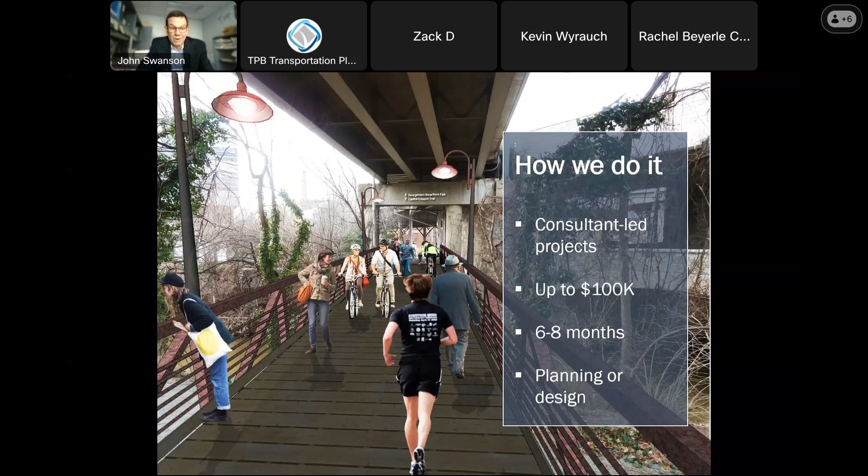We do it with a very simple model. It's a consultant-led program - the projects are consultant-led. We fund them up to $100,000. The projects typically last 6 to 8 months, and we fund planning or design. This is really a very small scale, quick turnaround program.

We've also created a sister program called the Regional Roadway Safety Program. This is really designed to address some of the really alarming trends that we've seen nationwide and in the region regarding safety and increased accidents and incidents on our roadways.

A few years ago, a regional study identified factors that contribute to our safety problem and recommended what could be done to reduce fatalities and injuries. Based on strategies in that study, we established the Regional Roadway Safety Program to fund short-term projects to make our roads safer, particularly for folks who are walking and biking.

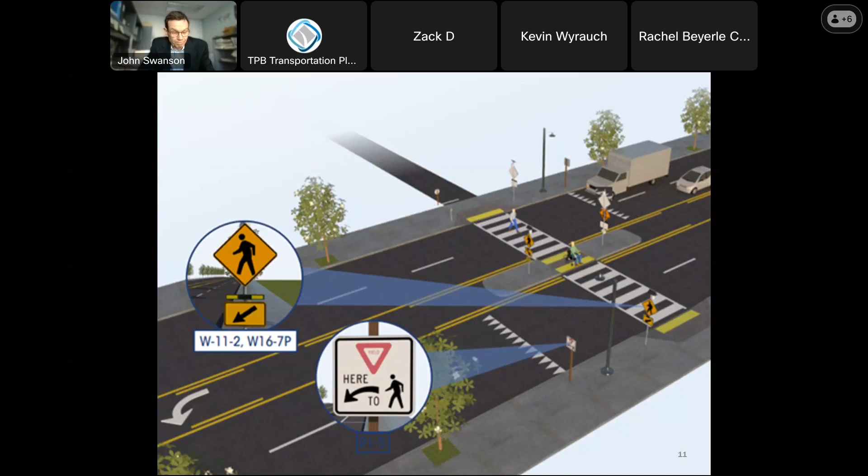In the past 2 years, we've funded 28 projects that take very practical steps, things like planning for infrastructure improvements at intersections and sidewalks, improvements in lighting and signage, designing new guidelines and standards, and conducting safety audits and analyzing crash data.

And finally, I want to tell you about a new program, relatively new, that's going to make it easier for folks to get to and from train stations and bus stations in our region. This is the Transit Within Reach program. We're going to be featuring one project from this program later on from Fairfax County.

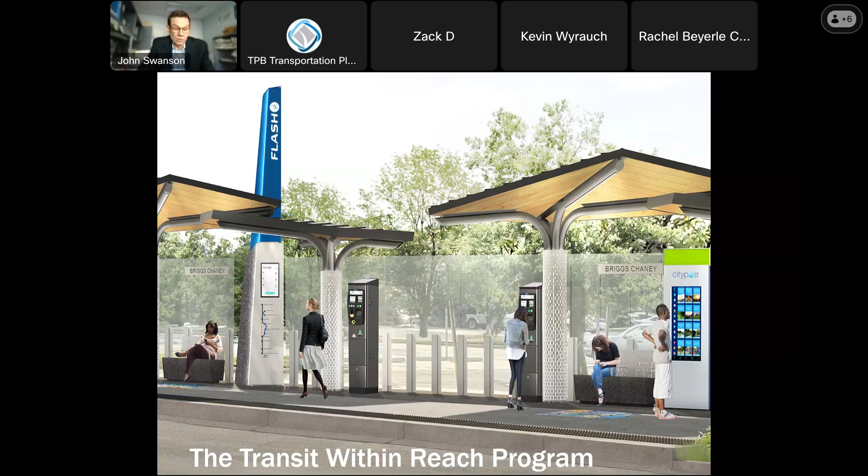But the idea here is simple. In principle, trains and buses should be within reach for a lot of people in this region because more than half of the region's job growth over the next decade is expected to be within a quarter mile of high capacity transit. But even where transit is physically close, it is often not within reach if you walk or bike. Sidewalks are missing, crosswalks are unsafe, trails and paths are yet to be built.

So the Transit Within Reach program was set up to fund preliminary engineering and design for pedestrian and bike improvements. And again, we're using the same model that we use for the other two programs I described. We have a few of these projects currently underway, and we're going to be funding a few more next year. The application period for that will be next fall.

So as you can see, these programs fund local projects, but we really do want to emphasize that this is a regional program. And that's one of the reasons we do regional webinars like this, so you can all learn from each other. And that's one of the reasons also why we have this database where you can download reports and learn about all the different projects and sort by project type.

Finally, I'm going to close with an important announcement. In January, we're going to be opening the application period for the next round of funding for both TLC and the Roadway Safety Program. The application period is going to open on January 6th. You can submit an abstract to get some quick feedback, and the deadline is going to be on March 7th.

So with that, we're going to get started on the program. The first person up is Alex Carroll from Alexandria. Alex has been making really good use of these programs in recent years. She's a real strategic thinker, and I'm excited to see what she has to share about this, the Pickett Street project.

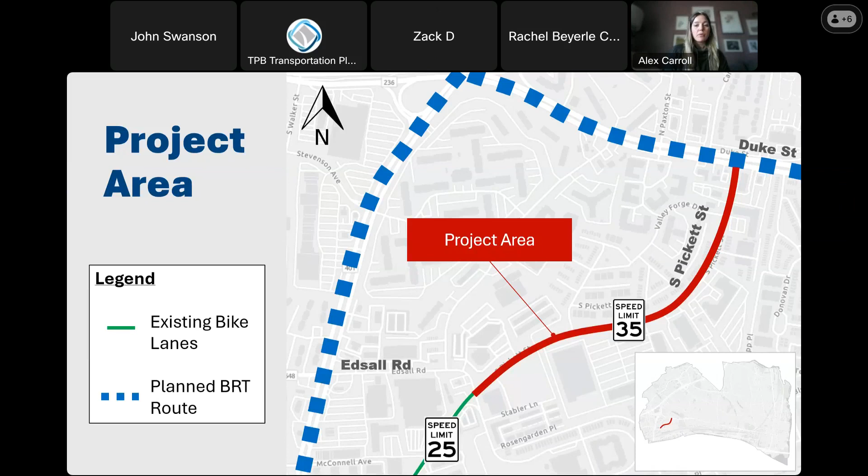The project area is South Pickett Street between Duke Street and Edsall Road. On the west end of the corridor, it connects to further along South Pickett with bike lanes. And then on the eastern end of the corridor, it connects to the future Duke Street Transitway, which is one of our major BRT corridors. So there's an opportunity to make some significant connections here.

It is not uncommon for people to bike here, but there is no dedicated bicycle infrastructure today. Their choices are to either ride on the narrow sidewalk or to share a lane with fast-moving motor vehicles, which can be a pretty uncomfortable experience.

There's also a lot of commercial activity along this corridor. There is a Home Depot and a few car dealerships, which generates a decent amount of truck activity. That is something we are cognizant of at the beginning of this project, ensuring that through the project design we accommodate trucks throughout that process.

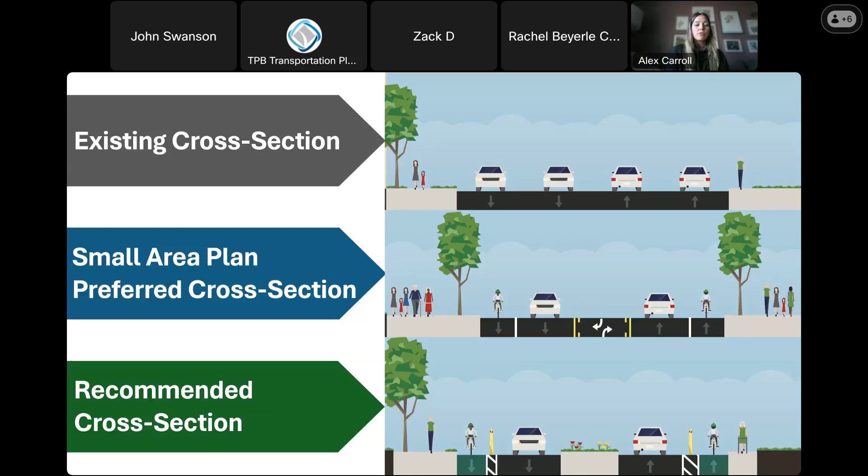We took all of that information and developed a recommended cross-section shown at the bottom here. That's a road diet that consists of one travel lane in each direction, a median that can also function as a turn lane, and protected bike lanes. That pretty much mirrors the preferred cross-section that was in the small area plan for this corridor.

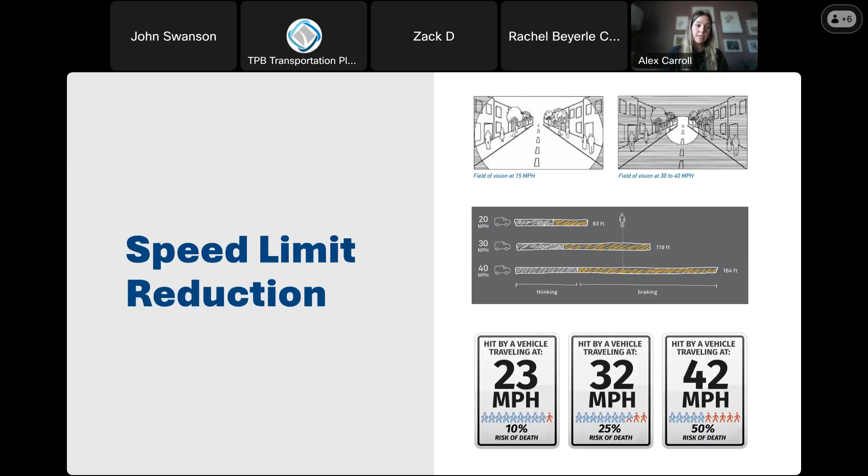In addition to the concept design, we also proposed a speed limit reduction from 35 miles per hour to 25 miles per hour. The idea being that we could reduce the frequency and severity of crashes and provide a consistent speed limit across the entire South Pickett Street corridor, not just in this singular project area.

This project does benefit all users. If you're driving, you can benefit from the safety benefits of a left turn lane. People walking have safer crossing opportunities. People biking will have a dedicated place to bike. It'll be easier to access bus stops along the corridor. And everybody can benefit from a slower speed limit and slower speeds along the corridor.

This project also features a variety of treatments that are classified by the Federal Highway Administration as proven safety countermeasures. Because of those documented safety benefits, we would expect that after implementation, the average annual crashes on the corridor would decline.

South Pickett Street has about 13 to 15,000 vehicles per day, which according to the FHWA makes it a good candidate for a road diet. We did perform a traffic analysis with support from RK&K and found that the corridor would continue to operate acceptably and that delay would remain virtually unchanged.

When we asked people what their priorities were, about half of folks said that minimizing motor vehicle delay was important. But at the same time, about two-thirds of people said that safe pedestrian crossings and safe travel speeds were also very important. So we incorporated all of these things into the project concept design.

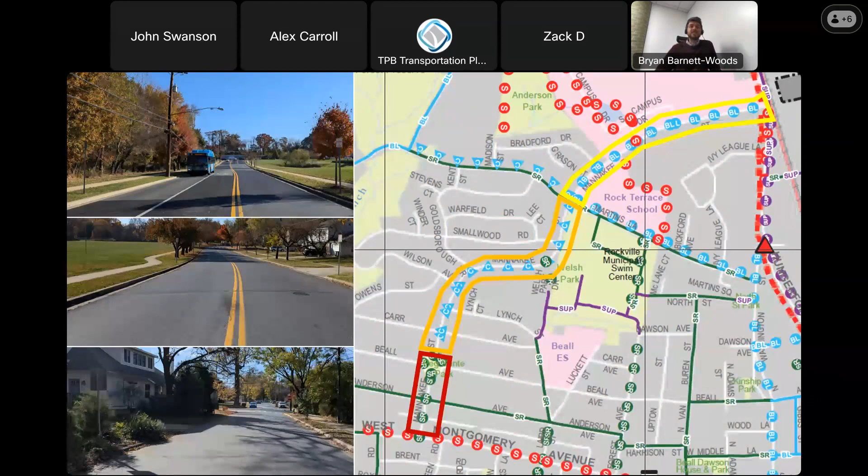Our Bikeway Master Plan from 2017 provides 3 different types of facilities along this corridor. I think the recommendations are all based on available right-of-way, so it's not the best practice to follow. We wanted to see what we could do on this street to help address concerns related to motorist speeding, and how we could provide things for people walking and biking.

To do that, we did a lot of outreach with the community. We did a lot of investigation of existing conditions, looking at where the existing parking is, where the existing traffic calming measures are, where there's opportunity for obtaining right-of-way, or where there won't be right-of-way, where we have sidewalks or don't have sidewalks.

We also listened to a lot of our residents. This corridor was identified by the Rockville Bicycle Advisory Committee as one of the top 5 streets for adding some kind of bicycle facility, so we wanted to look at that. A lot of residents have brought up issues along this corridor, and while those focus on intersections, they've all mentioned similar things: we don't like people speeding.

So what did our findings come up with? It was actually pretty similar to what the residents said. The 85th percentile speed wasn't so fast, but there were incidents of people speeding. Sidewalks needed maintenance, and right-of-way inconsistencies along the corridor made it difficult to provide a good facility. We also looked at crash histories, and we found a lot of angle crashes from people turning.

We looked at volumes to see if we could do all-way stops. It turns out we wouldn't be able to meet the warrants for all-way stops, but we could do traffic calming measures. So we used all this information, all the comments from the public, to come up with essentially 3 alternatives.

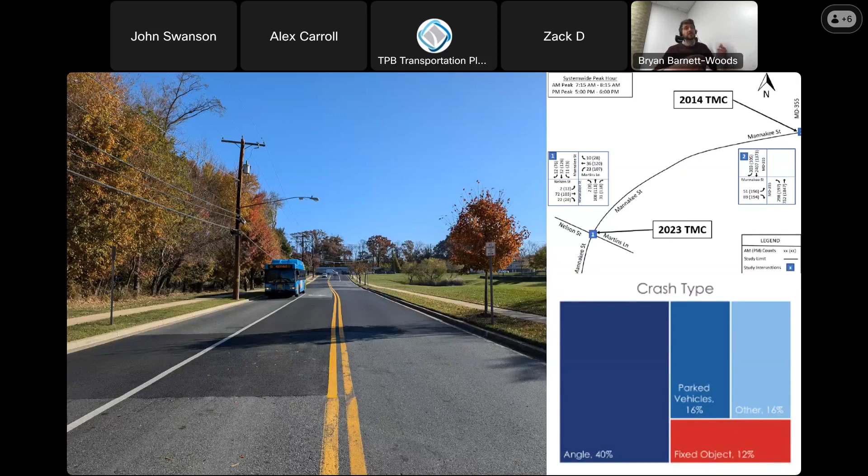This is the first alternative, what we call the quick build, low cost alternative, and it's to provide shared lane markings throughout the corridor. Sharrows aren't always the best bike facility, but if you can maintain low motor vehicle traffic speeds, they can be really effective in residential areas, so it's important to consider. I wouldn't want to stop them.

The next alternative has a bike lane that goes in the northbound direction with a shared lane marking in the southbound direction. It also eliminates one parking lane, which some residents didn't care for.

Our third alternative has bike lanes in both directions. It eliminates all parking except for a short segment near the park, at which point the bike lane goes onto a shared use path. Our images show the bike lane having flex-post delineators—that's optional, but the buffer is not. We think that's really the minimum for providing a bike facility.

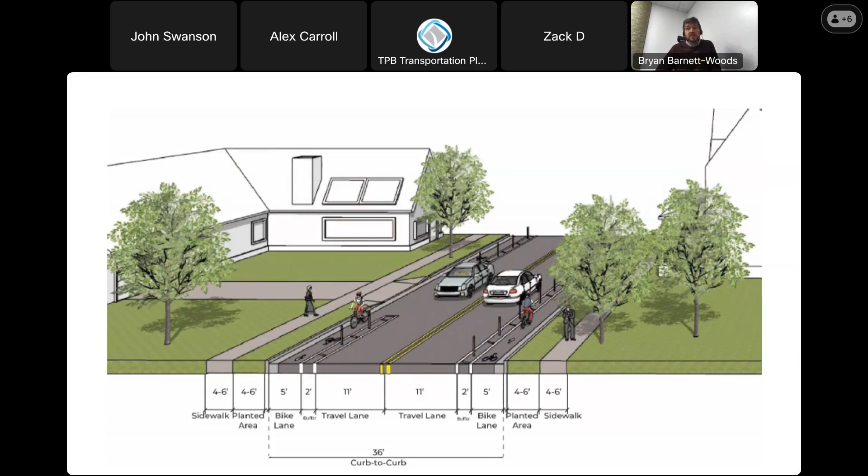For all alternatives, we want to have traffic calming, because we recognize that before we can make it safer and more comfortable for people to walk, bike, and use transit, we really do need to help encourage safer driving speeds and more yielding. So raised crosswalks, pedestrian refuge medians, curb extensions, bump outs—those sorts of things.

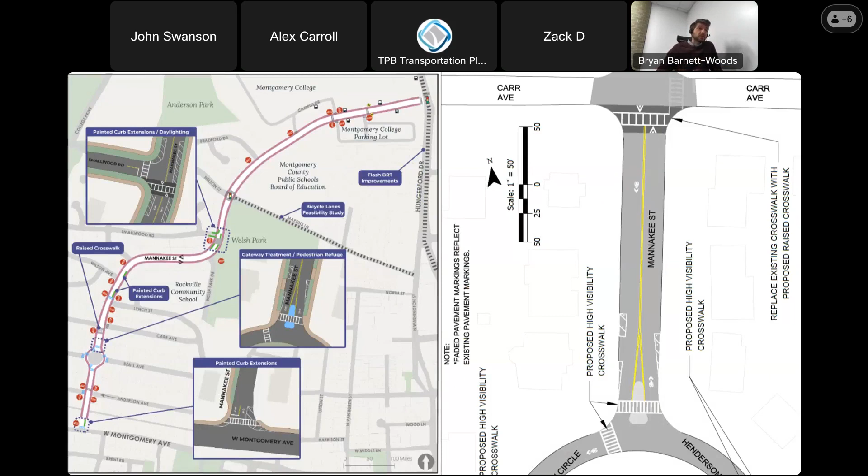So we brought these alternatives to the public. This is the bike lane one, conceptually what it might look like, and they all hated it.

Which was unfortunate, because I think the bike lanes really could be an opportunity to narrow the lanes and encourage slower driving. But they viewed it as, oh, this is just a bike project, that's not what we want for our community. So I think there was really an opportunity for improvement in messaging.

Although, to their credit, they did support a bike lane along the section of Mannakee that was near the college, which is shown in the middle here.

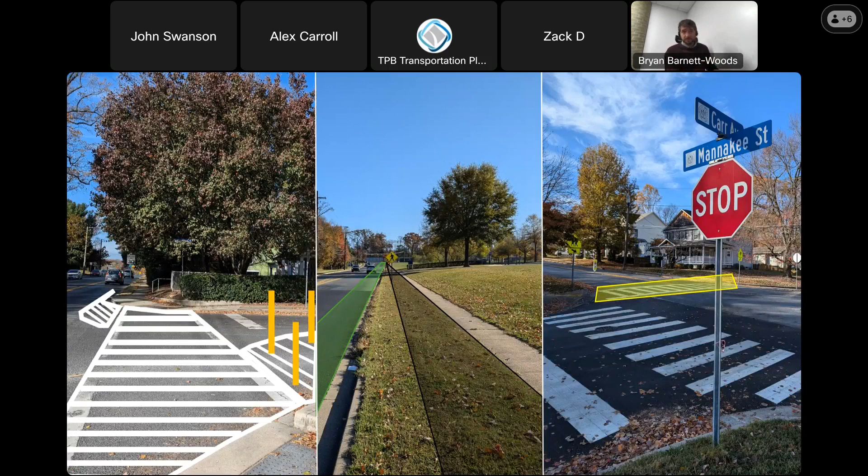They were really keen on daylighting intersections, kind of like what we have on the left at West Montgomery, and then also traffic calming. So here on Carr and Mannakee, we wanted to have a raised crossing to really help reduce travel speeds.

The public also really liked the idea of using pavement markings and flex posts to do bump outs that could be made permanent if they're effective, as well as providing a pedestrian refuge median as part of the traffic circle, which is in the southern part of this section.

So the next question is, okay, so we have all these, how are we actually going to implement them? The city has a roadway resurfacing, asphalt, and concrete maintenance program. Next year, Mannakee is on the list of streets that will be resurfaced. And so as that street is resurfaced, we're going to be implementing these improvements.

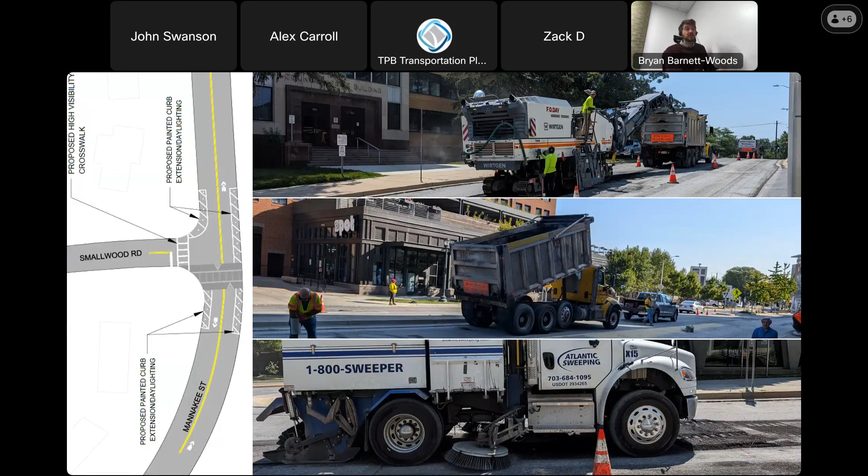We've already started to do that, and you can see here, we've replaced the raised crossing with a more visible one. We've added pedestrian signage, a paddle sign that's in the street. You can see pavement markings to help prevent people from parking too close to that crosswalk.

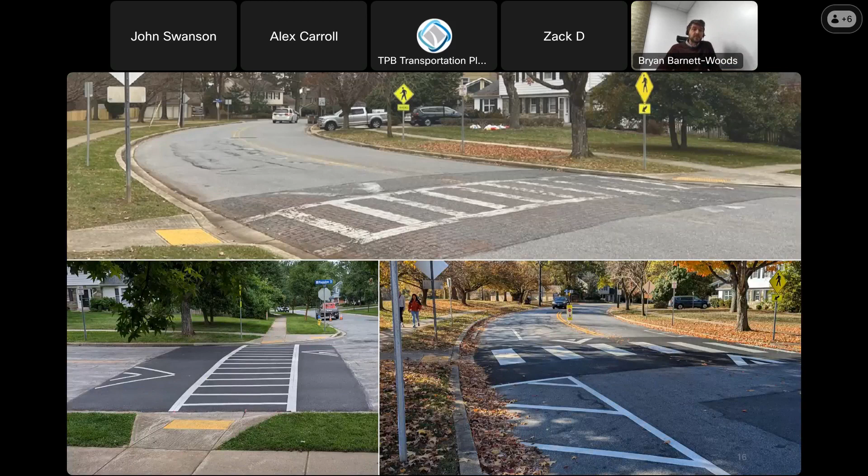And actually next month we'll be adding flex posts to those pavement markings to further identify that.

And so we will listen to what the public is saying when they raise requests, but also what we see. We're really looking forward to bringing this project to fruition, and I'd be happy to answer any questions you may have afterwards. So thank you and have a good day.

Excellent, Bryan, thank you so much. Yeah, really kind of exciting to see how focused you guys are on implementation and also taking community comment into consideration.

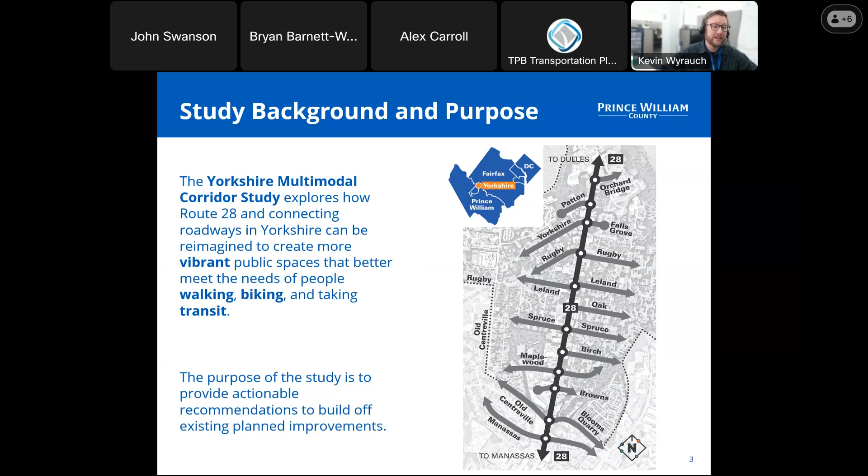The study background explores how Route 28 and connecting roadways in Yorkshire can be reimagined to create more vibrant public spaces for biking, walking, taking transit, all multimodal trips. The purpose of the study is to provide actionable recommendations to build off of existing planned improvements that we already have. So our study process was assessing existing conditions, analyzing gaps in our network, engaging stakeholders, developing actionable recommendations, prioritizing our projects, creating cost estimates for those, designing cut sheets that show the improvements, and producing the final report.

The most important study that's already been done is the VDOT Strategically Targeted Affordable Roadway Solutions Study, or STARS study. It has a lot of roadway improvements already in there, and our intent was to build off of this study that was already taken place with an enhanced focus on the walkability, bikeability, and livability of the corridor and surrounding neighborhood.

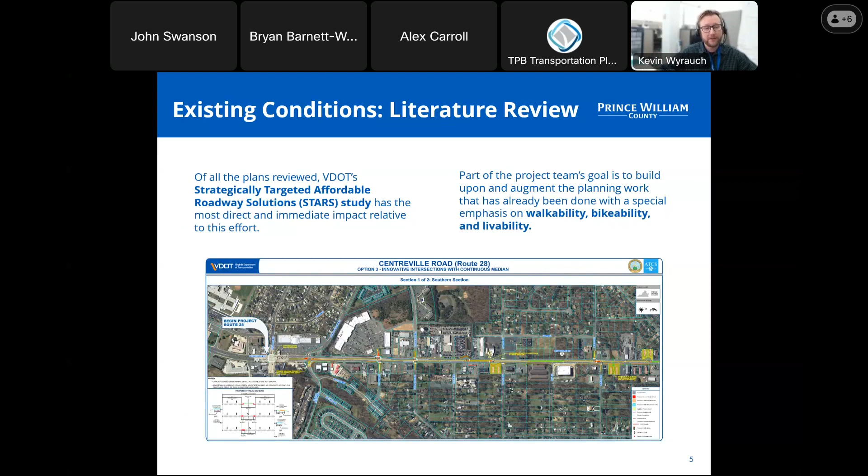So our study area inventory showed that there is a very disconnected sidewalk network. Most of the sidewalks are in residential neighborhoods, not really connecting to Route 28. There were some gaps in the bicycle network as well, some connecting to outside parks, but again, disconnected overall throughout the corridor.

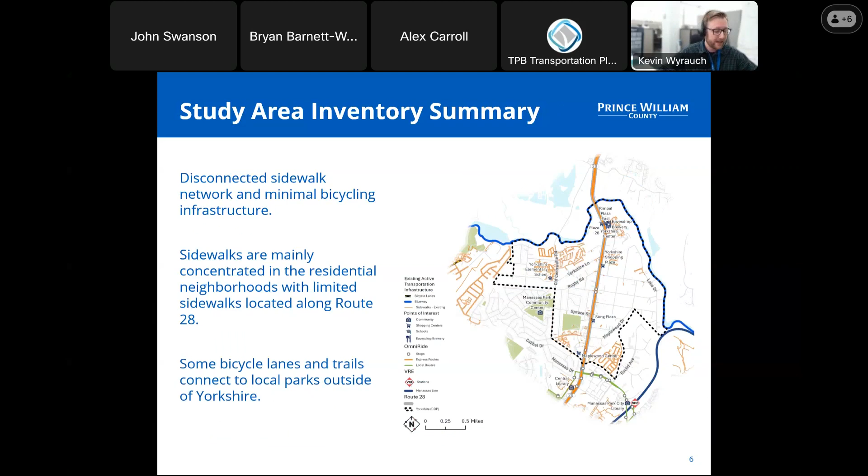When we did our corridor audit, we saw a woman crossing with a stroller at an unmarked crossing in the top left-hand corner. We also saw lots of curb cuts on Route 28, missing crosswalks, sidewalk gaps everywhere, slope issues that make it difficult to add capital improvements, and complex intersections.

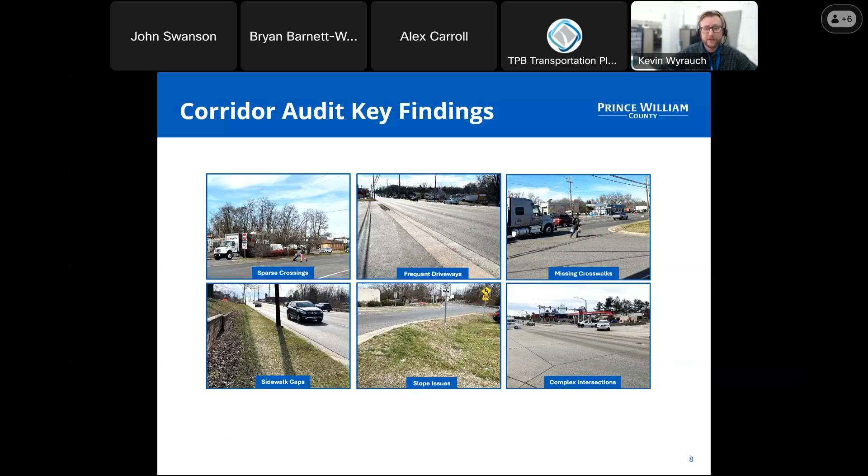Our toolbox for recommendations addresses things from a pedestrian perspective: crosswalks, eliminating curb cuts, tightening curb radii, signals, and traffic calming. But there are also a lot of placemaking elements in our recommendations, including street furnishings, bus stop amenities, and shared use paths for bicycles.

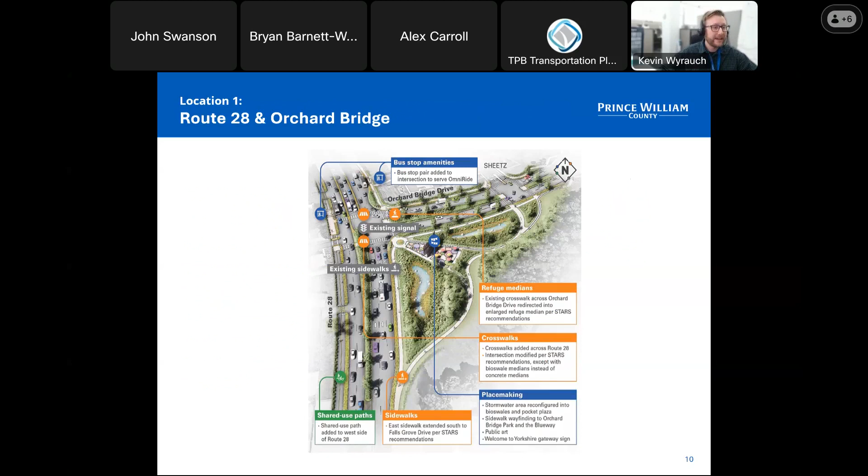We have a lot of sheets like this with recommendations for each individual intersection: refuge medians for pedestrians, crosswalks, placemaking such as artwork, enhanced bus stop amenities, shared use paths, and sidewalks.

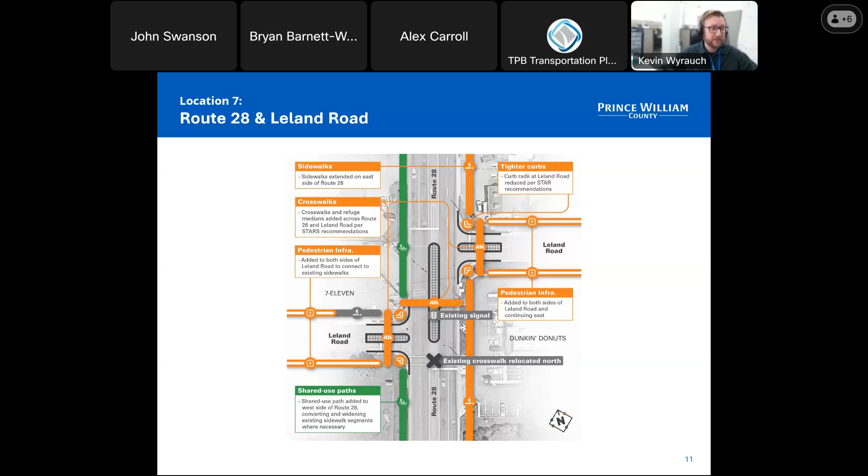This is an interesting intersection because it's offset, so the recommendations have to be a bit more site specific here: tightening curb radii, eliminating curb cuts as much as possible, and adding shared use paths and pedestrian infrastructure, not just to Route 28, but towards the adjacent neighborhoods along the side streets as well.

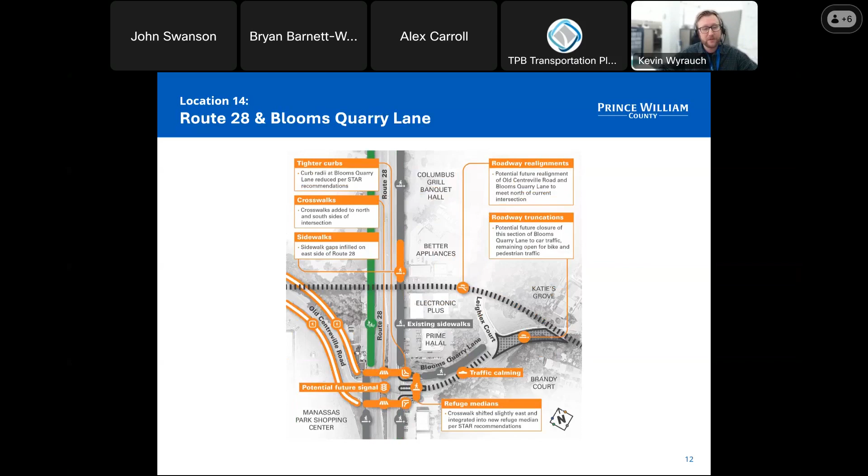Another example is at Route 28 and Blooms Quarry Lane: roadway truncations and traffic calming to discourage cut-through traffic on neighboring streets, since Route 28 has a lot of congestion. Some of the same recommendations apply here, such as refuge medians and tighter curb radii.

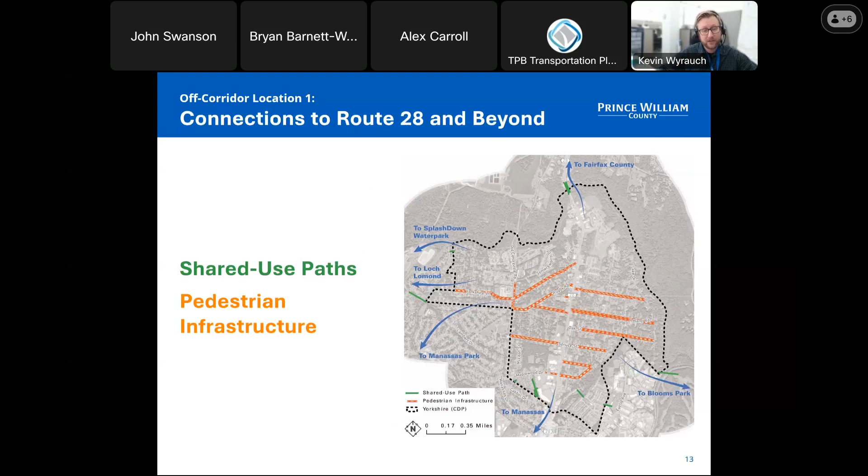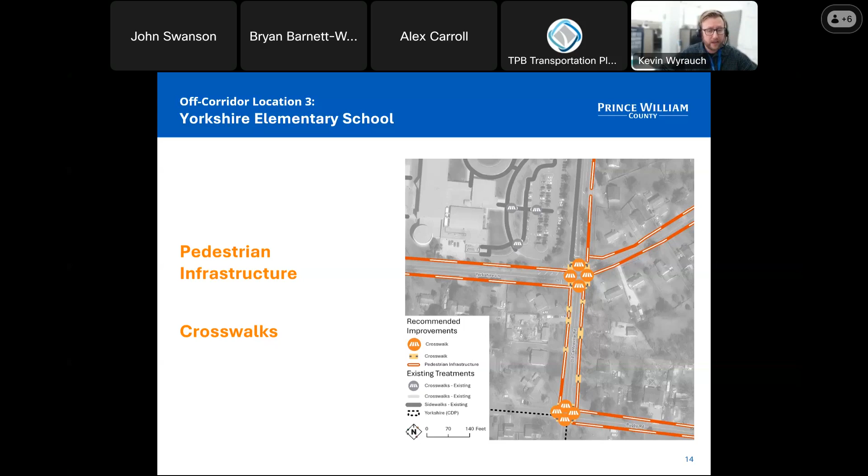Yorkshire Elementary School is actually outside of the Route 28 corridor, so we took a special look at this area with recommendations for sidewalks and enhanced pedestrian infrastructure at the intersections, knowing there are a lot of kids in this neighborhood who walk to this school, and we want to make sure we have a focus there.

Our stakeholder and community priorities were somewhat similar but differed a little. Safety is the biggest consideration, obviously, but congestion mitigation was also a big one. It's still a very auto-oriented corridor, with some enhanced emphasis on economic development, bike-ped infrastructure, and placemaking as well.

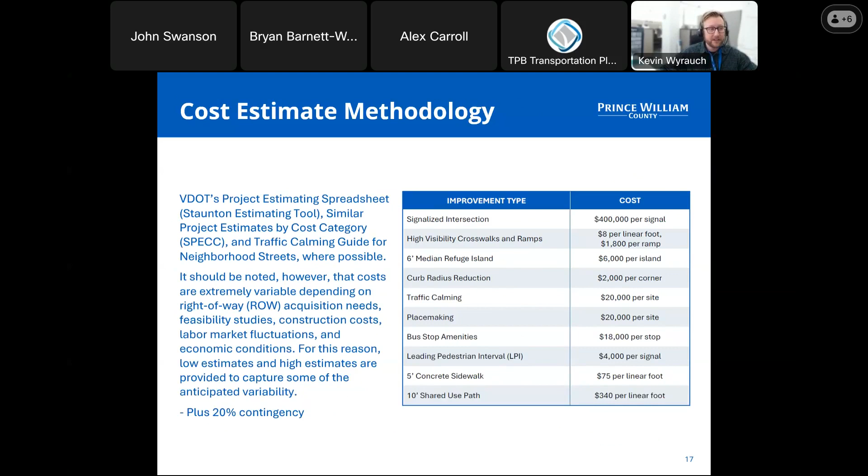Using cost estimates developed with the VDOT project estimating spreadsheet, we were able to develop high and low estimates for each intersection in the corridor, since it's different everywhere based on right-of-way needs, constructability, and economic conditions. We also include a 20% contingency for each of these estimates.

Our next steps are outreach to the neighborhood, including the Spanish-speaking community, conducting a small area plan to guide future growth and development per the comp plan, and integrating these recommendations into ongoing efforts such as the county's safety action plan and the VDOT STARS study. We need to identify and secure funding, such as federal and local grant programs, and partner with the arts community for placemaking. That is it.

That was a lot to get through, but this is the vision we have for this corridor, and I want to thank you for your time today.

Thank you, Kevin. That was awesome. I love that, and loved seeing how robust this project was. Also, so much opportunity and need, obviously.

But the jurisdictional complexity is hard, it's mind-boggling—Manassas Park and Manassas, and they all came together at that point. It's a big challenge. Yeah, and they were stakeholders too, involved throughout the process as well, so there was a lot of interjurisdictional planning and coordination as a result.

Awesome, thank you. Now we're moving on to a project from our Transit Within Reach program, which focuses explicitly on 30% design and preliminary engineering. Zach Desjardins from Fairfax is going to be talking about the Prosperity Avenue Road Diet project. Zach, take it away.

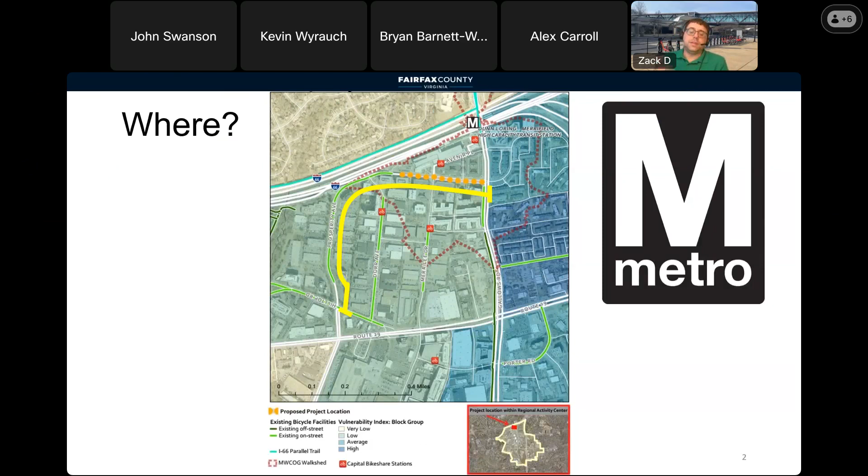We're going to talk about Prosperity Avenue, a 4-lane street that runs near the Dunn Loring Metro, between Gallows Road and Hilltop Road. The project area is highlighted in yellow. There are existing bike lanes shown in green, and I've also shown the vulnerability index, which measures how vulnerable people are within Fairfax County. You can see there's a large vulnerable block near the Metro.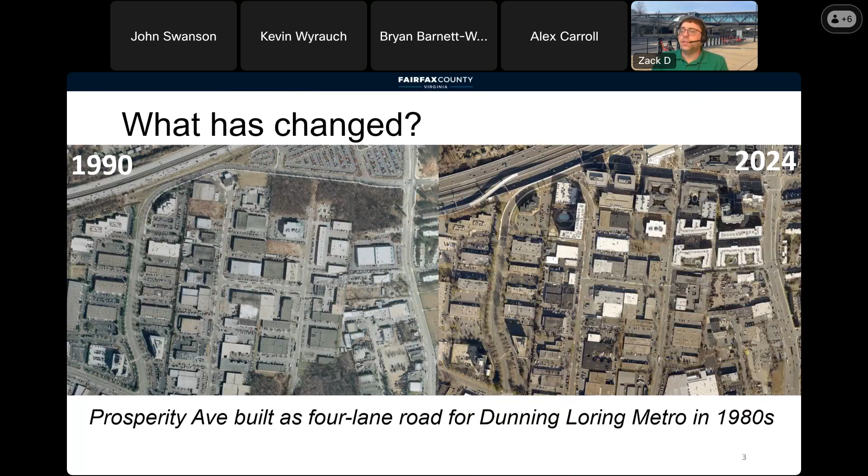Prosperity Avenue was built in the early 1980s as a 4-lane road, when Merrifield was warehouse-oriented and auto-oriented. Now, as you can see in 2024, the neighborhood has changed, but the road design has largely not changed. We did a road diet on one section in 2020, but the section closest to the Metro, the most important part, has retained 4 lanes.

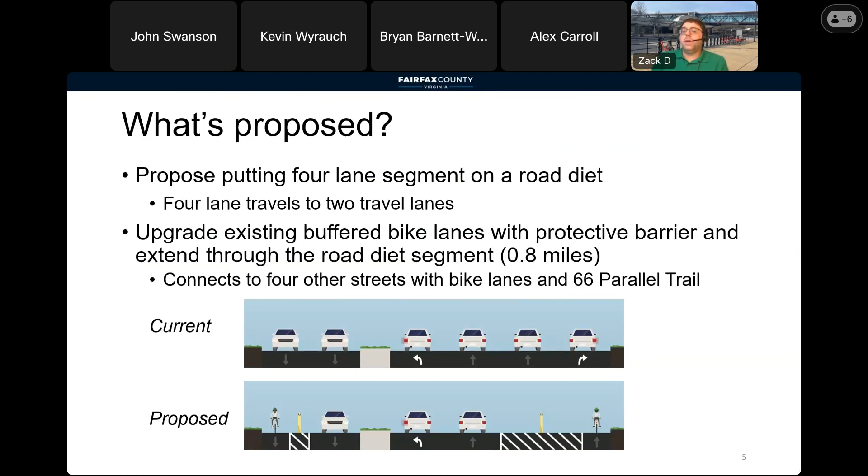So what we're proposing is to put that 4-lane section on a road diet, reducing the number of lanes from 4 to 2 for vehicles. We'd propose upgrading the existing buffered bike lanes with a protective barrier and extending that through the road diet segment throughout the corridor, connecting 4 different streets as well as a new trail along I-66.

In terms of outcomes for people who drive, we did a traffic study with the help of Toole Design, and found very small increases in delays for drivers — just 1.5 seconds at the Merrilee intersection and about 7 seconds at the Gallows Road intersection.

In terms of outcomes for people who bike, today there are just sharrows on the 4-lane section of Prosperity Avenue. We're proposing concrete-barrier-protected bike lanes, similar to what we've seen in Arlington and Washington, D.C.

For outcomes for people who walk, we're going to significantly reduce the crossing distances by about half, and we're proposing banning right turn on red at many of the signalized intersections throughout the corridor. There are 9 crosswalks throughout, so this would provide a significantly safer way for people to cross the street and get to and from the grocery store and many other locations.

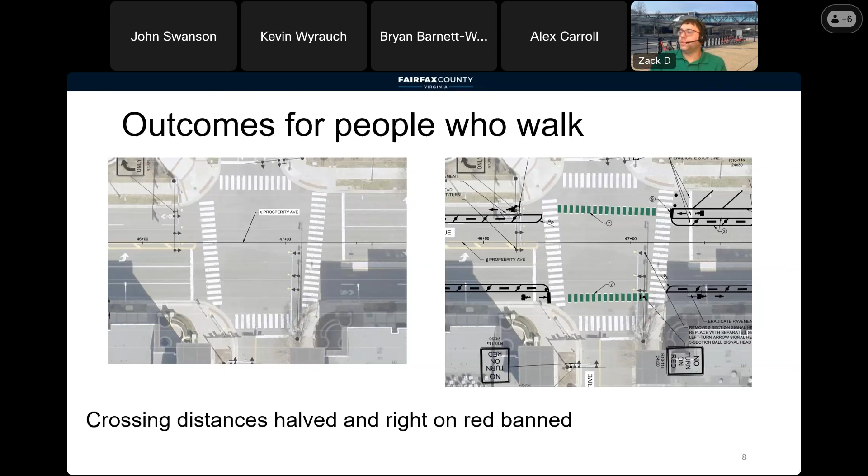In terms of next steps, we're likely going to construct the project with local funding. Stay tuned for a public meeting, likely in early 2025. We're including a survey, and if you have questions after the presentation, feel free to send me an email. Thank you.

Awesome, Zack, thank you. Again, a really exciting project, this one specifically oriented toward that Metro station, a road that is pretty wide and sort of ready for a road diet. I noted when I went out there, the U.S. Citizenship and Immigration Services is out there as well, so that's a place where a lot of transit-dependent people need to access — tremendous need and a lot of opportunity. Thanks for that, and as I'm seeing in Fairfax, you guys are really moving forward with implementation, and that's another thing we love to see here.

I am going to move on. Wait a minute, who's next on the list? Who was next on the list? Was it Kevin? Yep, it's me. Kevin, sorry, I got my list for a second. That's okay. Yeah, are you ready to go?

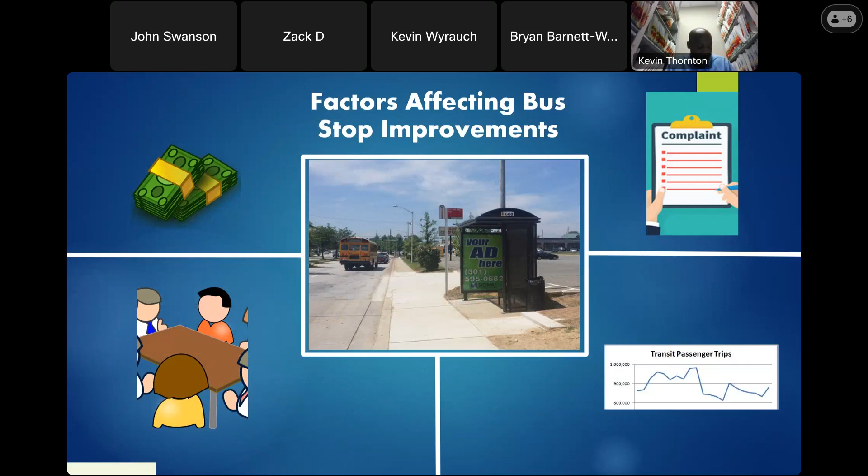A portion of those bus stops were installed when bus stop placement regulations were not emphasized. In older neighborhoods, the cost of bringing a single bus stop to compliance could become very expensive. So enter the TLC award in 2023, and our report wrapped up this past summer. We're really excited about the possibilities of pairing the GIS tool with our bus stop improvement program.

So the case study relevancy: our primary piece of shaping the recommendations of this study was to look at what made the peer agencies' bus stop programs work. Some commonalities were tier-style frameworks for bus stop amenities. They had uniform bus stop design standards, and shared methodologies that were data-driven and community-centric, which indicated a more comprehensive approach.

So this is the idea that we think will advance our bus stops from tier 4 to tier 3 status. This will give us serviceable bus stops that meet ADA requirements. Data collected using the new GIS tool will allow us to identify tiers for each of our stops and inform decisions on where we place amenities, like shelters and benches.

So we can envision a process that will enable us to qualify bus stops in our network. The methodology of the process is to identify current stop conditions, assign stops in condition-based tiers, and improve our bus stop network by promoting tier 4 stops up to tier 3 status.

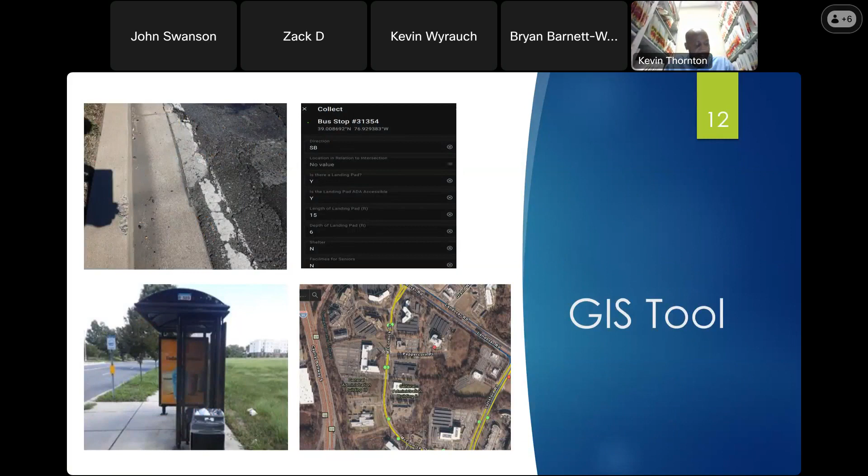So we'll qualify those stops by putting the GIS tool to work. Using our bus stop safety study app, we'll be able to collect extensive data at the stop level, statistical data like average daily riders, and informative data like proximity to schools and senior centers. With important layers like justice, equity emphasis areas, those layers will be valuable to help us assign bus stop improvements more equitably.

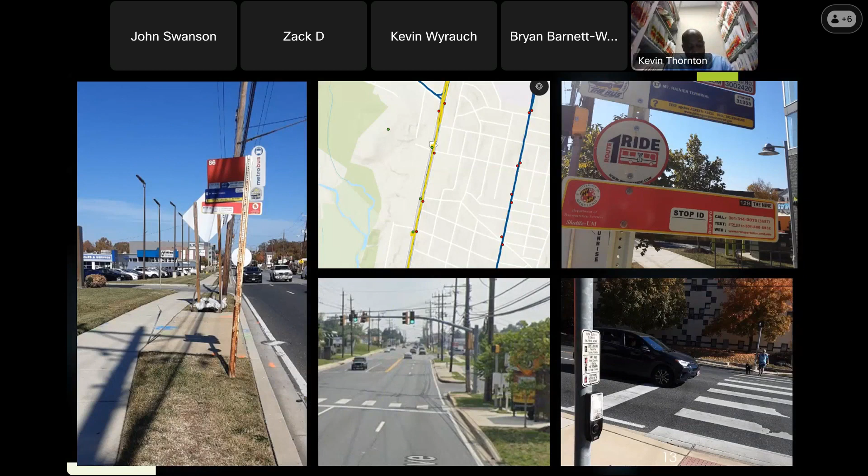We also expect the tool to prove beneficial to our bus stop program. In addition to collecting important attribute data, we'll be able to document bus stop issues in real time. This will allow our bus stop database to better reflect current bus stop conditions, and as the database grows, we'll have the ability to query important stop information.

The acquisition of this tool really comes at a busy time for us in transportation planning for the county and the region. We foresee it being an asset to upcoming studies like the Purple Line, which may be right around the corner, the Better Bus Network redesign, and of course our ongoing bus stop improvement program. Thank you guys for your time and attention.

Awesome, Kevin, that was great. Just the enormity of what you guys are working with there, and the challenge, is really, really impressive. As opposed to a small corridor, you were really looking at the whole county, and tremendous need. Hopefully this is something we can feature in future presentations, and the rest of the region can learn from. So thank you. Thank you.

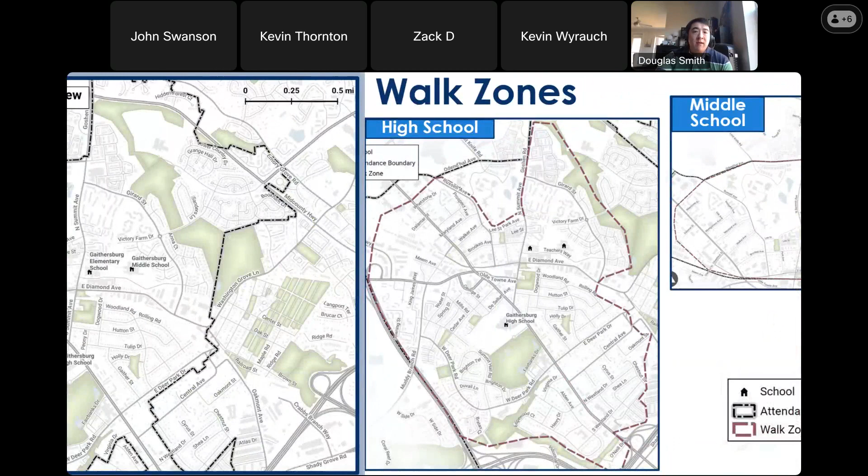The study area for this project consisted of areas around our Old Town neighborhood, which is east of I-270 and north of the Inter-County Connector, Maryland 200. This was based on the walking area for the three local public schools: Gaithersburg Elementary School, Gaithersburg Middle School, and Gaithersburg High School. Showing those walk zones, the high school uses the largest radius, about 1 mile extending out in all directions.

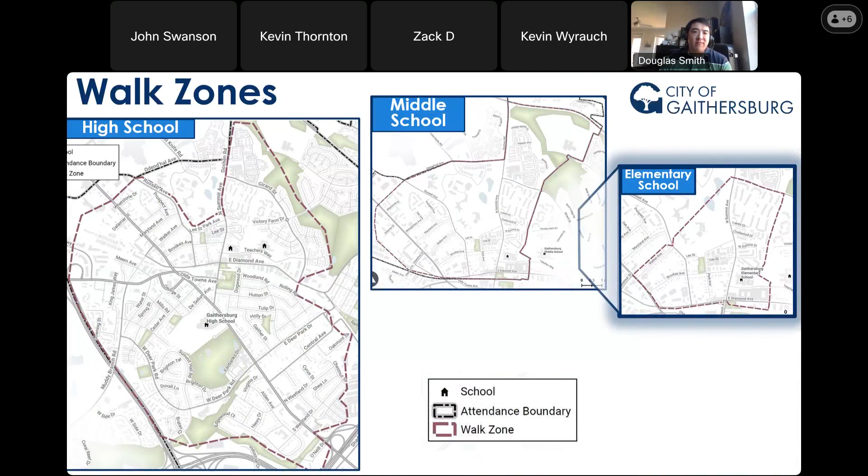The middle school's zone is about 1 mile, but only goes toward its north and west. And the elementary school's walk zone is about half a mile, again only to its north and west.

On the other hand, the attendance zones are far larger, especially for the high school and middle school. There, students are up to 9 miles from the high school, almost as far from the middle school, which is many times larger than their walk zones. The elementary school is limited to a little over 1 mile, so only about twice its walking radius.

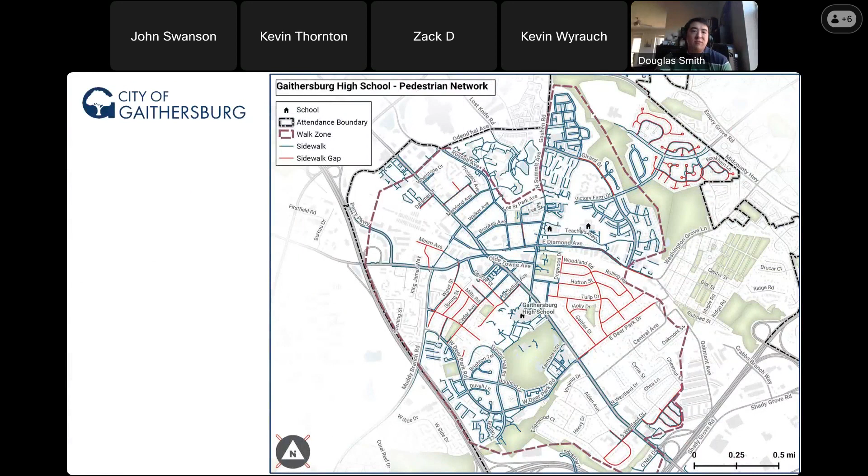This graphic shows the presence or absence of sidewalk in the study area, with blue lines on each side of a street representing sidewalk, while the lone red lines show gap segments with no sidewalk on either side. The worst gaps are primarily in clusters on older neighborhood streets in the middle here, off the main roadways. The busier and higher speed streets do mostly have sidewalk on at least one side.

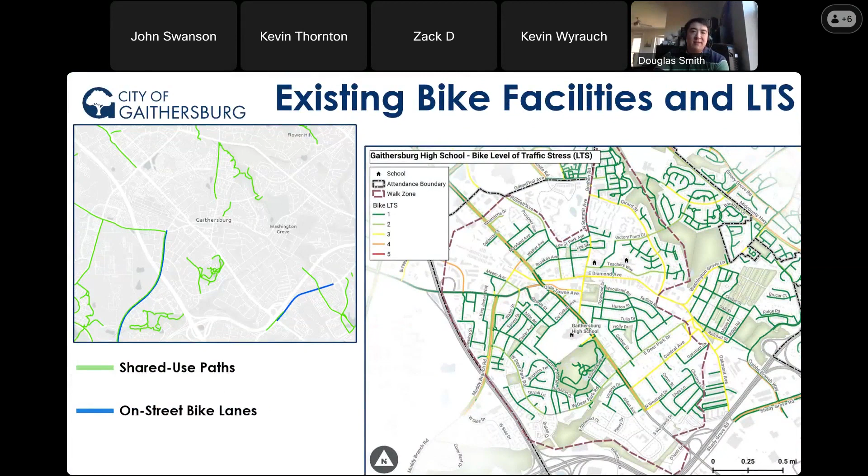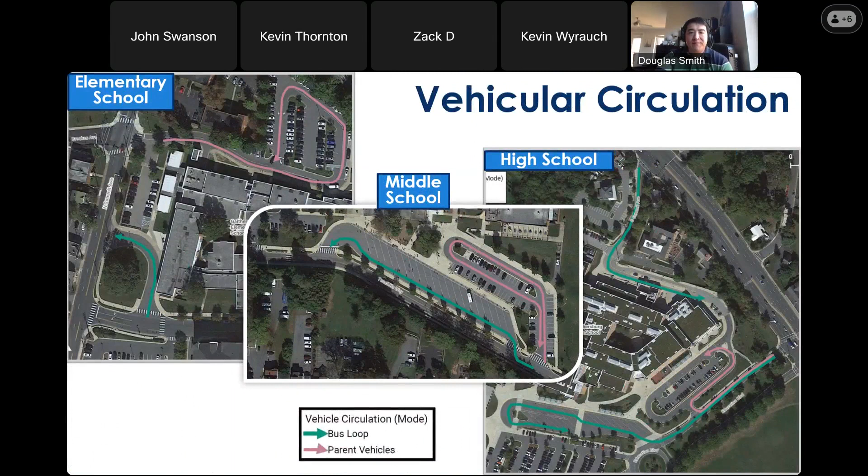Concerns noted specific to the high school included missing curb ramps on site, large clusters of students crossing Route 355 on red and then overflowing its narrow median, and poor sidewalk winter maintenance along the east side of Route 355. Our observation was just after a snow day.

Before and after our walk audits, the city team and Toole Design got to meet with the administrators and the security team of all 3 schools to go over general student commute information and all their specific issues and concerns with student commuting. This gave us a lot of useful context for our observations before and after each walk audit.

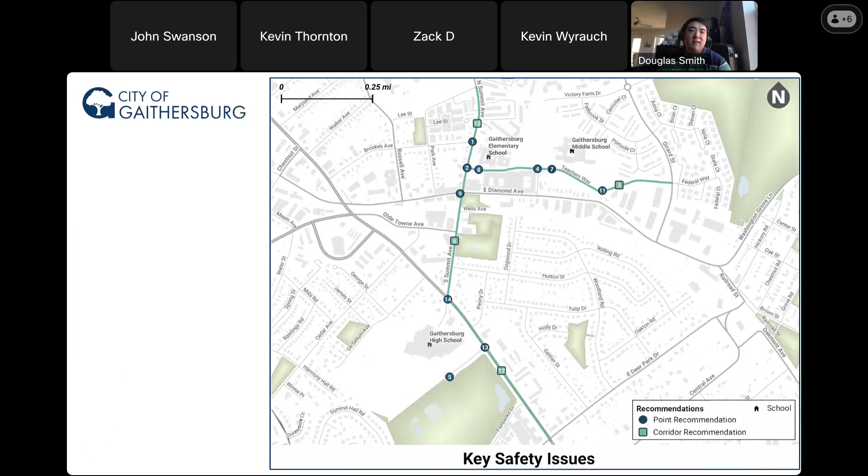So Toole identified key safety issues, which were almost all on Route 355, Summit Ave, and Teachers Way along the school frontage. These included signal improvements, crossing improvements, and other calming, including curb radius reductions. And we're aiming to address all of these through our initial project.

Some other identified issues labeled quick wins were smaller things like curb ramp upgrades, better crosswalk markings, and crosswalk signage. We plan to primarily implement these recommendations as part of city maintenance work rather than as official capital projects.

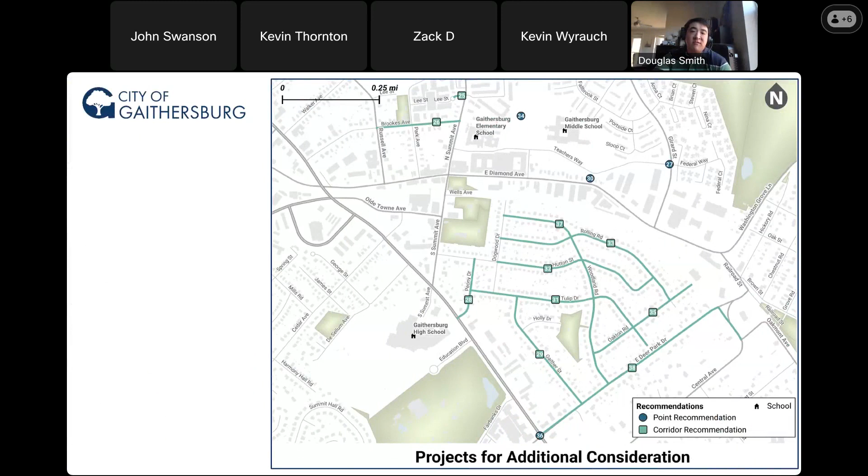Projects that were not the top priority, but for additional consideration, were primarily new and widened sidewalks, especially in this cluster near the schools where there's basically no sidewalk in the neighborhood—the Deer Park neighborhood. Also, traffic calming on Brookes Ave west of the elementary school, and then a median crossing island on Girard Street at Teachers Way.

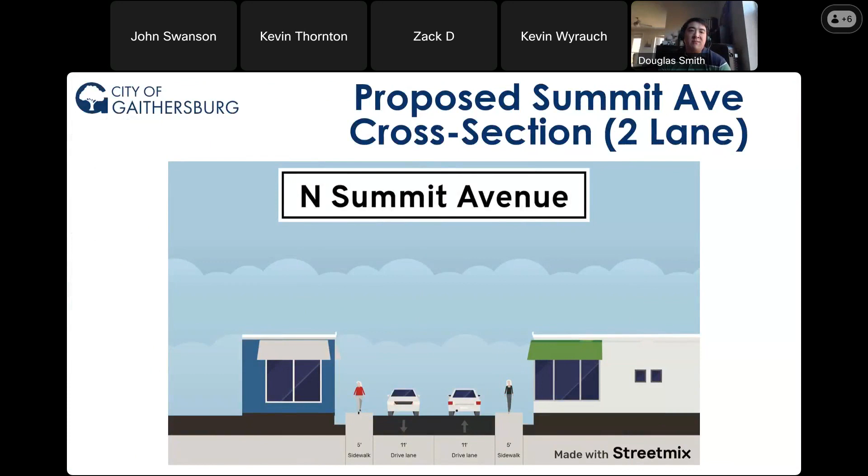To illustrate an example recommendation, here's a sketch Toole did for the 2-lane section of North Summit Ave where the sidewalks currently need additional buffer. Most sections of Summit Ave are a little wider and could maintain the third alternating left turn lane while still narrowing all 3 lanes to provide wider and more buffered sidewalks.

Many of the high priority recommendations were for Route 355, which the city does not own. However, the county's planned BRT project will widen sidewalks and the median and narrow the travel lanes, addressing many of the existing concerns while also improving bus service, which some of the students use.

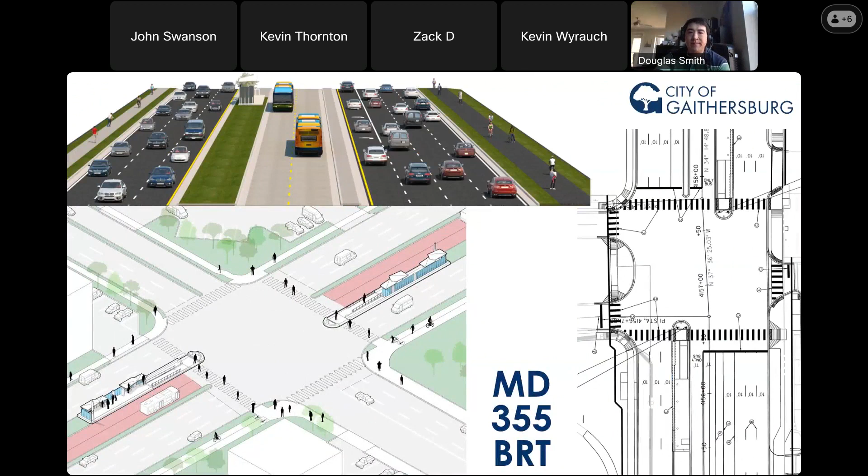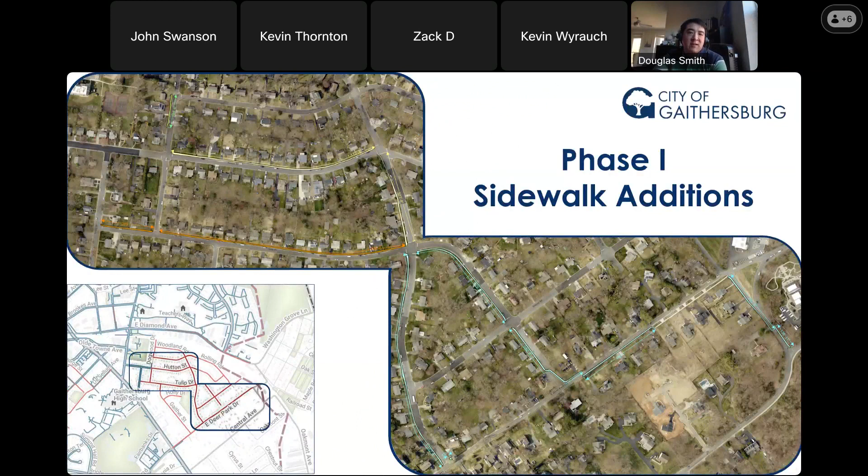As our first step to tackling the rest of the list, the city is proposing a phase 1 project to install the most feasible selection that will serve the most disconnected neighborhood and create a longer distance path between the south side of Old Town and the Washington Grove MARC station. We're considering two paths here that would be entirely within our right of way, a northern and southern option on the west side.

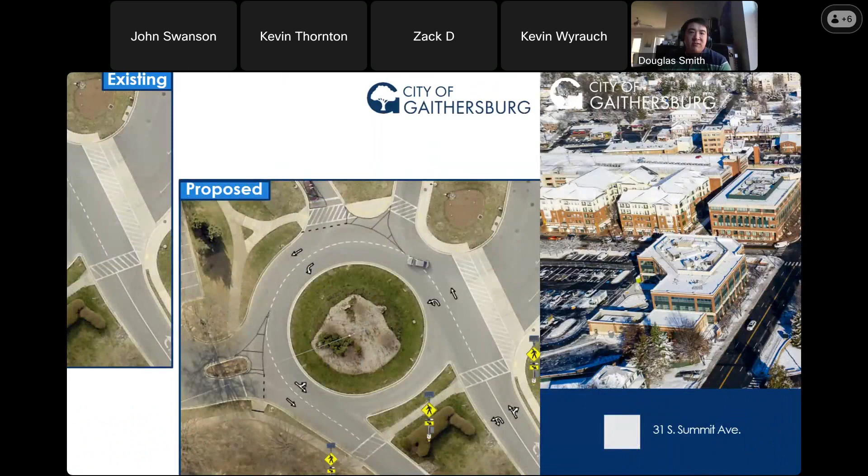The high school entrance on Education Boulevard currently includes a roundabout with very unclear lane assignments. We plan to create painted or raised islands to reassign the lanes, and we hope to add RRFBs at the multi-lane legs, again under the phase 1 project. In addition to those, we plan to address all the other key safety issues, either under phase 1 or under other projects already planned.

Here we see South Summit Avenue. At the top, we're improving one of the key signals at Diamond, and we're also planning to signalize the intersection in the middle, Old Town Avenue, which is very busy. Along with that, we'll do other general traffic calming to try to calm traffic overall.

Fantastic, thank you Doug. And thanks to Gaithersburg for all the great work you're doing pulling a lot of different pieces together. I know this really complements some of the other work that's been funded through our programs for the shared use path between Old Town and Washington Grove. It's great to see all these pieces coming together.

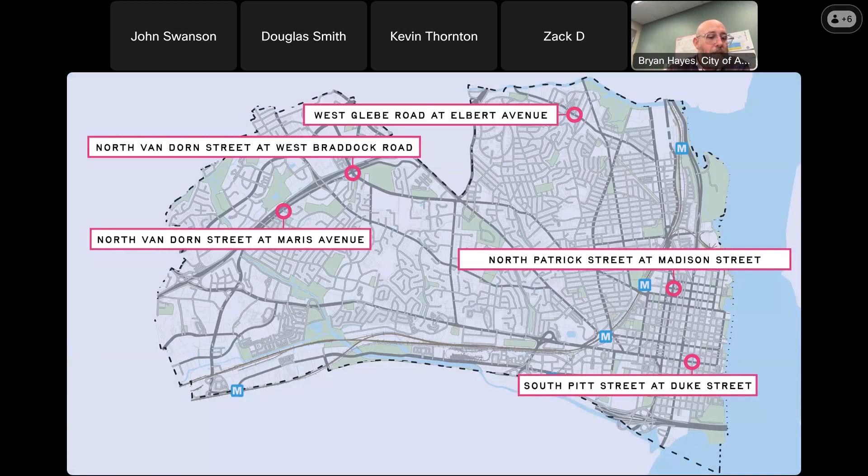This presentation is going to look at one specific location, the intersection of North Van Dorn Street and Maris Avenue. North Van Dorn is a four-lane road, two lanes in each direction. It is wide, and people like to drive fast. The intersection with Maris Avenue has HAWK signals, so they are pedestrian activated. There are bus stops on either side of the road, and as you can see here, there are also street lights. These were updated in 2020 to LEDs.

The incident we're going to look at involved a car driving westbound and a pedestrian walking eastbound. The collision occurred when the car made a left-hand turn onto Maris Avenue as the pedestrian was in the crosswalk. The police report showed that a witness said the pedestrian was observed in the crosswalk, but the driver countered that they did not see the pedestrian. Why is that? The main reason, as you'll see in a second, is that even though there are streetlights, those streetlights don't tell the whole story.

Horizontal illuminance shows us that the ground was really well lit. Vertical illuminance shows that maybe the area above the ground where the person is wasn't well lit. So maybe the driver could have seen the shoes. They definitely saw the crosswalk.

One of the best parts of the project was going into the field with our engineers, our operations staff, police department, and the consultants to collect a bunch of data. We went to all 5 locations overnight one evening, learned how to use the tools, and collected all of the readings.

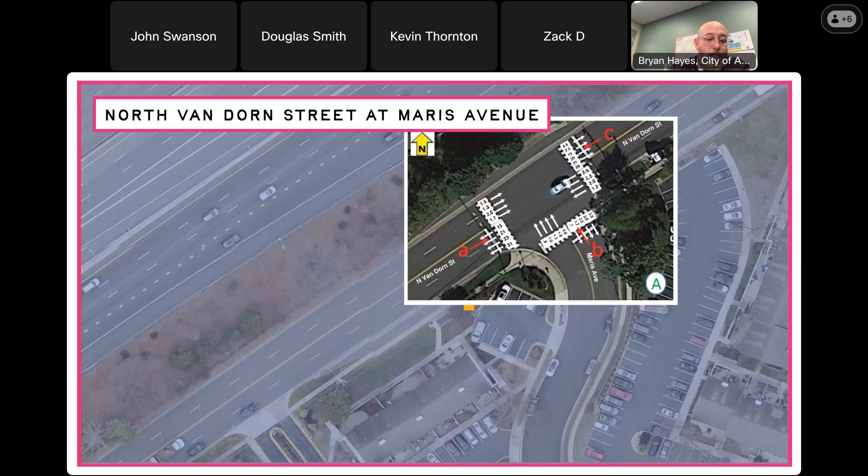This slide shows some of those readings, and here we show some of those other readings. I don't expect anyone to read these readings in detail. I think the main thing to see here is that in each of these crosswalks, you can see the crosswalk, but it's hard to see the pedestrian. Again, this shows that while the lights are doing an effective job at illuminating the road, they're not doing a great job at highlighting the pedestrian.

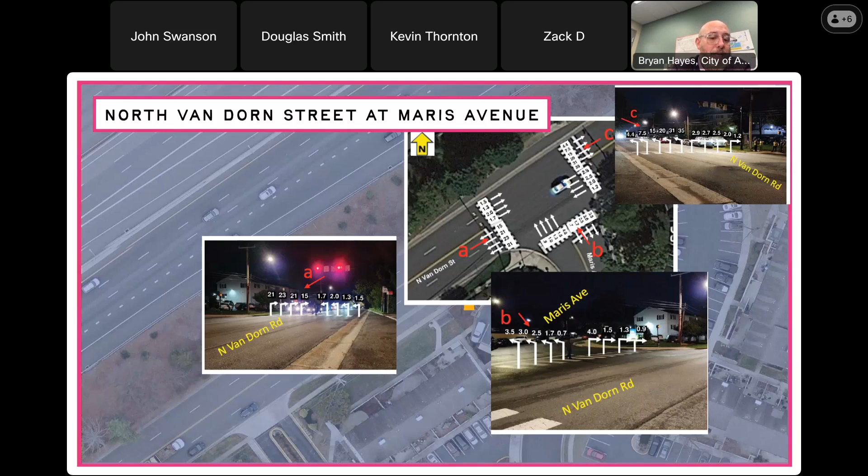This reflects the high level learning that our lights are adequate, but really more can be done at these locations in particular. More thoughtful design can happen to make our crossings safer for pedestrians.

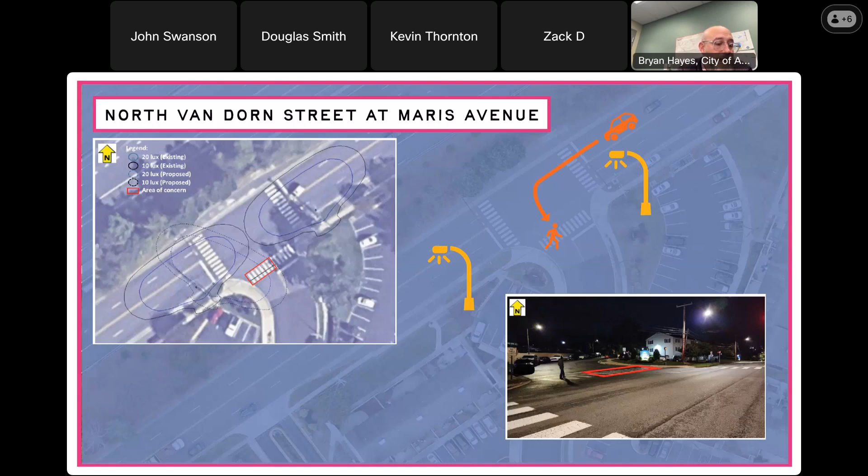This is a really good example, looking at the same intersection. The ellipses on the image on the left show the existing lighting patterns, which show we're lighting Van Dorn Street. There's a dotted pattern at an angle, which shows how an additional light could be used to better illuminate the crosswalk across Van Dorn, but also this area of concern highlighted in red on the crossing across Maris Avenue, which is where the collision occurred. So being mindful about how we use lights, not only to highlight the roadway, but also those areas where pedestrians are, is something we seek to look at.

The recommendations are many. They include maintaining and updating our list of crashes, looking at our crashes every few years to make sure we're identifying those areas where crashes are happening at night. Our built environment is always changing, trees are growing, so it's important to identify those places where lighting may be a concern, and then prioritize improvements that will impact the lighting. This includes working with partners like Dominion Energy, who oversees our lighting network, training staff, and identifying new funding opportunities to implement and install new lights as we move forward.

The consultant on this was KLS Engineering, the subcontractor was WSP, and of course COG and TPB were great partners as well. So we learned a lot and look forward to being more mindful with our lighting as we move forward and think about safety.

Fantastic, thank you. Yeah, it's such an obvious pun, but it's really illuminating to think of some of the maybe, I don't know if I'd say obvious, but some of the real opportunities and the ways in which a study like this can make a very direct impact. So looking forward to seeing the results of that.

The final presentation is from Chloe Ritter from the city of Fairfax, who's going to be talking about the Main Street Road safety audit out there. Thank you. Hi, I'm Chloe Ritter, a transportation planner with the city of Fairfax, and TPB awarded us a regional roadway safety program grant to conduct this road safety audit on Main Street, which is a major arterial in the city.

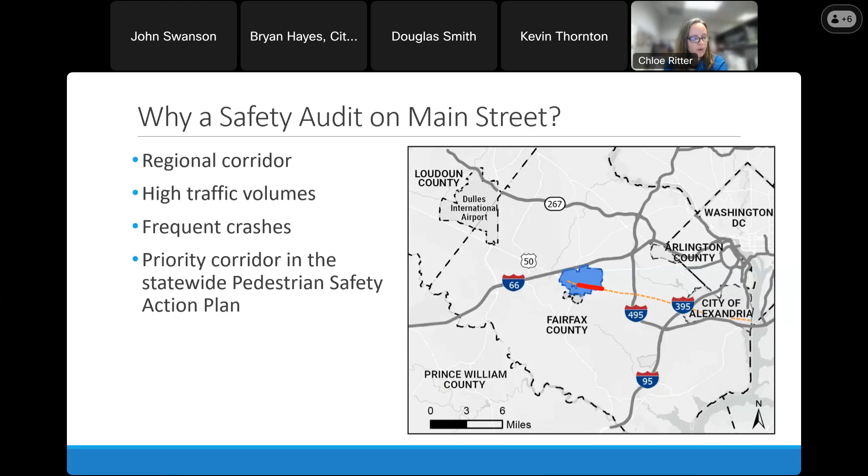The study corridor is about 1.7 miles long. It's the thick red line on this map, and it's part of Route 236, which is the dashed line. It's a major east-west connection through Northern Virginia between Fairfax and Alexandria, with high traffic volumes along the entire corridor and frequent crashes. It's also a priority corridor in the statewide plan. In addition to regional traffic, there's a really diverse mix of road users and destinations along the study corridor, with busy shopping centers, schools, several residential neighborhoods, and multiple transit routes.

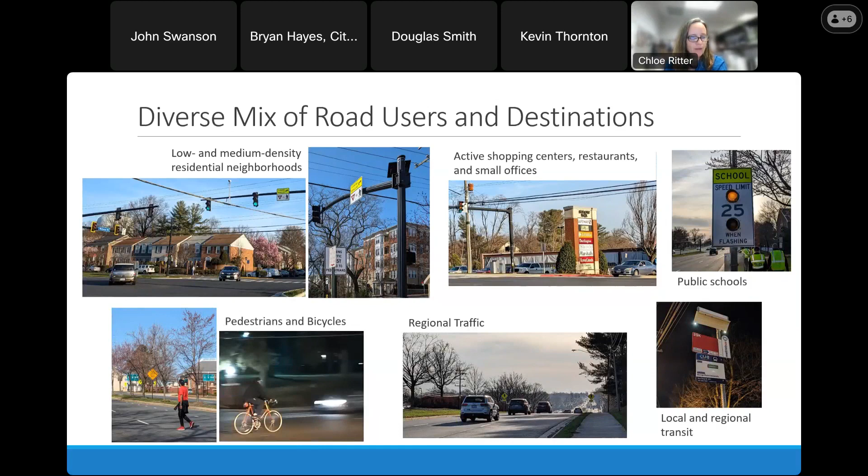So we see a lot of people walking and biking and riding transit, as well as driving and coming and going from all of those neighborhoods and shopping centers. The road width varies along this corridor. At the widest point, it's about 100 feet wide with 6 through lanes, and at the narrowest point, it's 60 feet wide with 4 lanes.

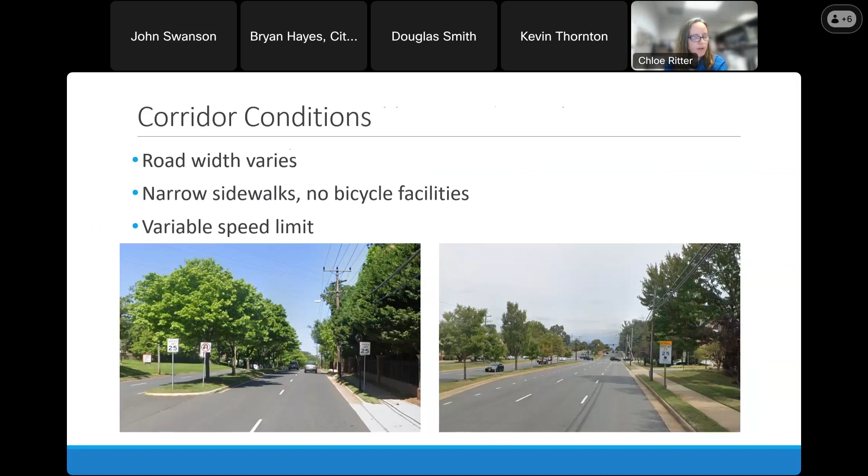The speed limit drops from 45 to 35 to 25, and it also has a 25-mile-an-hour school zone. Rear end and angle crashes were the most common types of crashes in our 5-year crash data. Contributing factors included driver age, distraction, and speed, with other potential factors including access management and turning conflicts. There were 2 pedestrian fatalities and 73 injuries.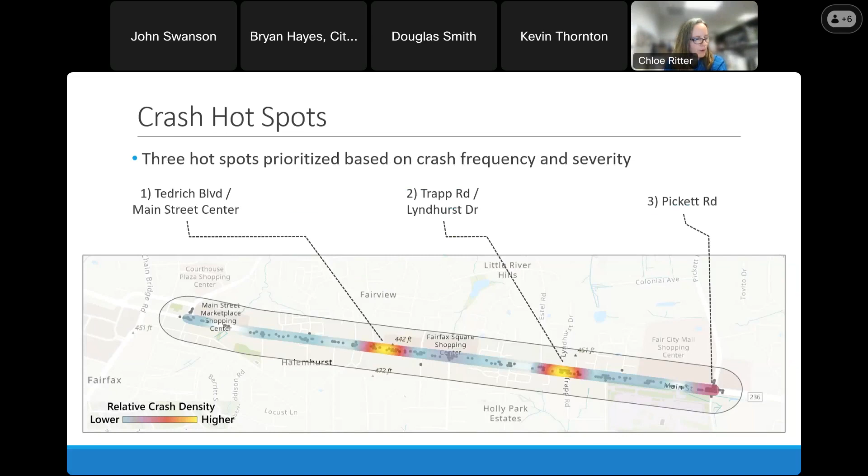We also zoomed in on a couple of hotspots identified based on the total crashes weighted by crash severity. The 2 locations in the middle of the corridor are where we had the 2 pedestrian fatalities, and there's a lot of traffic and conflicts at the 3rd location at Pickett Road. We'll talk about those in more detail.

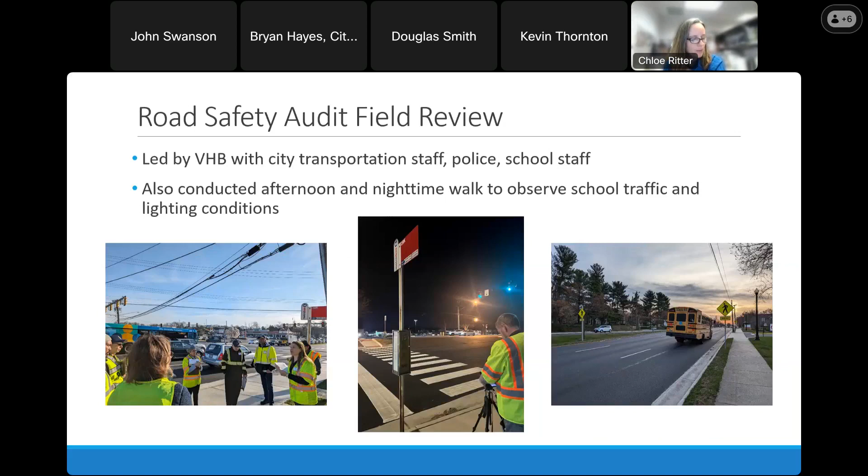Our consultant, VHB, led the road safety audit field walk with city staff and staff from the high school on this corridor to observe behaviors and conditions on the ground and provide more context to the data, and other issues that we saw. They also conducted a nighttime walk and identified a lot of areas with low lighting.

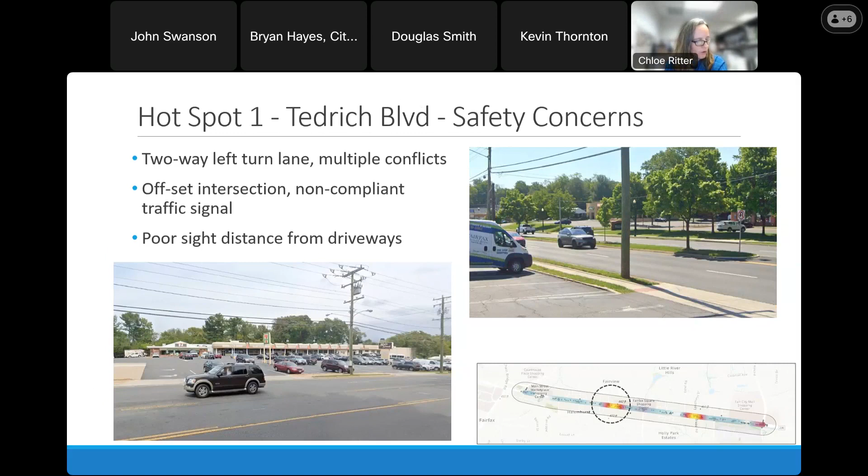Now I'll talk about the hotspots. The first one is a shopping center at Tedrich Boulevard, which has 5 driveways within 600 feet with access from a 2-way left turn lane. It's also right next to the intersection of Tedrich, which is a non-standard intersection, and there's a lot of turning movement conflicts and pedestrian conflicts here.

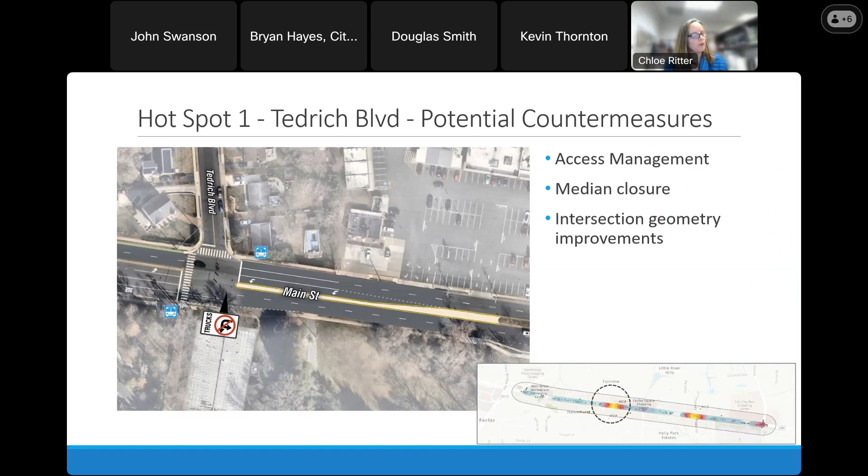The recommended improvement for this area is to improve access management, replace the 2-way left turn lane with a median, and reduce the width of the signalized intersection to make it more standard. We'll have to look more closely at how that's going to impact the increase of U-turns at nearby intersections.

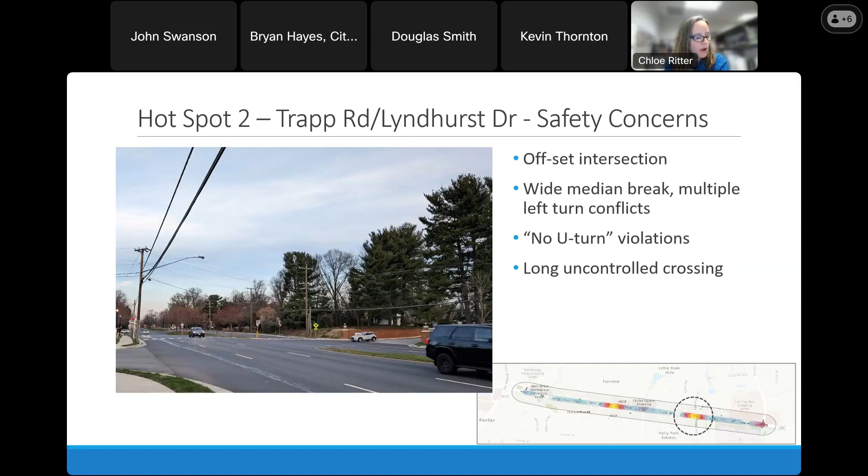The second hotspot is at the intersection of Trapp Road and Lyndhurst Drive, which are offset from each other north and south of Main Street. There's a really wide median break that creates a lot of conflicts and confusion for vehicles turning left into and out of the neighborhoods. There's a marked crosswalk, but it is unprotected, and it's about 100 feet wide across 6 travel lanes. This is where the other pedestrian fatality was.

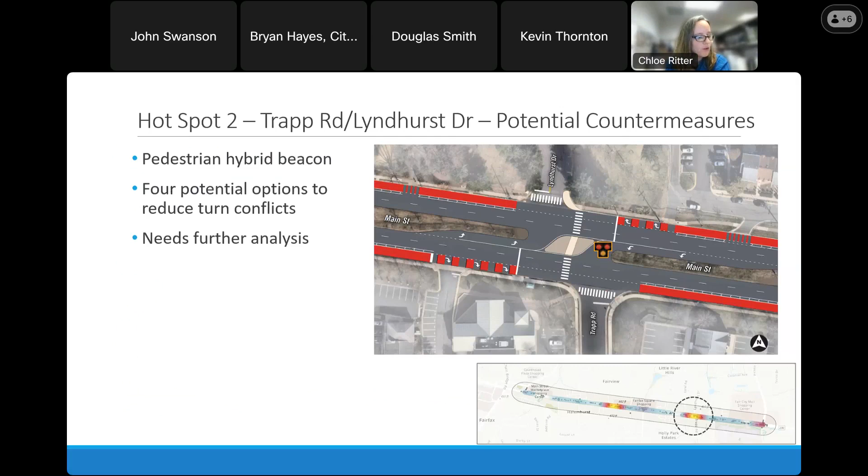So we looked at a couple of options. I'm just showing one of them, which has a restricted crossing U-turn intersection, or an R-cut, which would divert side street left turns to U-turns at other intersections. We also looked at potentially adding a pedestrian hybrid beacon at this location.

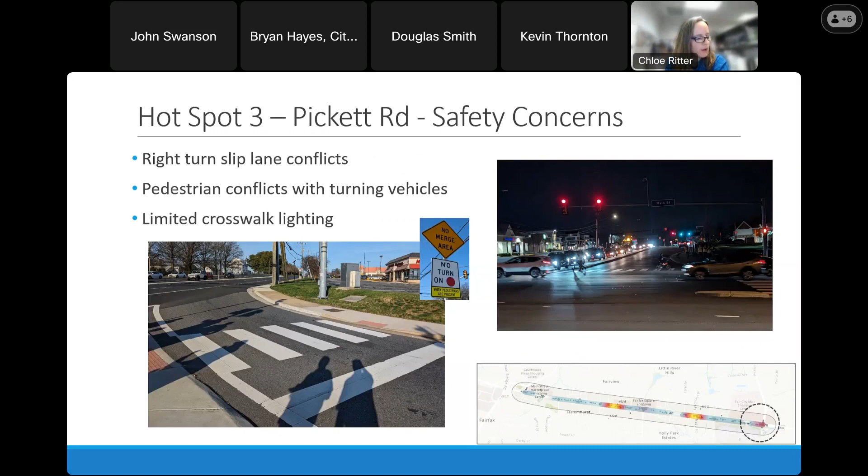The third hotspot is at Pickett Road, which is the busiest and widest section of the corridor. Some of the specific concerns at this intersection included vehicle conflicts in a right turn slip lane, pedestrian-vehicle conflicts at the corners, and low lighting on the crosswalks. If you look closely at that dark image, you might or might not see the pedestrian there.

Recommendations for this location include modifications to that slip lane, a leading pedestrian interval potentially with some other turn restrictions, and additional lighting at the crosswalks for all of the corners.

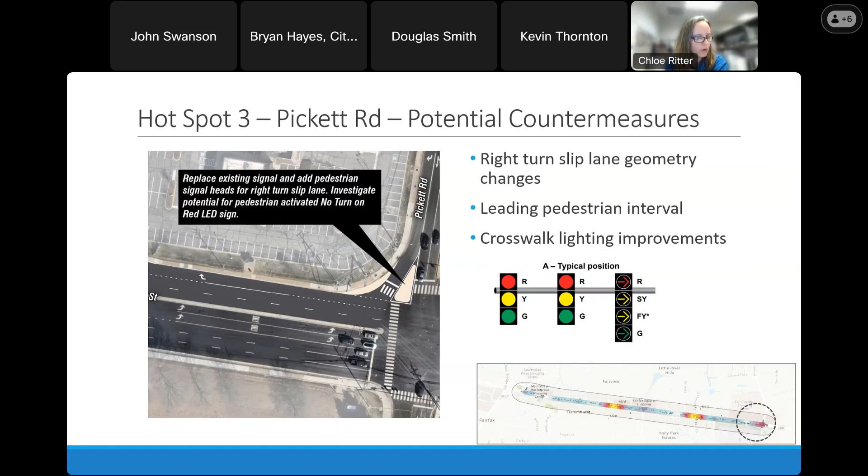In total, this road safety audit identified over 30 potential countermeasures across the entire corridor. I just talked about 3 specific locations, but the report is organized to help us begin identifying priorities with high-level assessments of the impacts and benefits for different user groups, and assessments of potential costs and timelines to help us have a framework for implementing the recommendations.

We are starting to work on some of those initial priorities, including funding to add lighting at several intersections. We are also proposing local funding to begin developing one of the concepts for the Trapp and Lyndhurst intersection improvements, and including other low-cost improvements with our maintenance program. Thank you very much to TPB for the program support and for this opportunity to talk about the project.

Great, Chloe. Awesome, thank you for rounding that out. What a great, robust, and very focused project. You, just like City of Fairfax, like so many of our partners, are doing such incredibly good work, and really impressive. I think there's probably a lot that we can learn from all of you.

We do have some time for questions and answers, and I'm not seeing anything in the chat, so it gives me a chance to ask my questions, because I love this stuff, and it's a great chance for us all to hear from you. If folks could bring up their cameras, our presenters, that'd be helpful. But I'd just like to ask a really basic question. We're going to be entering into a new application period, as I mentioned, January to March. What suggestions would you all give to potential applicants for the TLC program or the roadway safety program, or later next year, the Transit Within Reach program? Just some guidance suggestions.